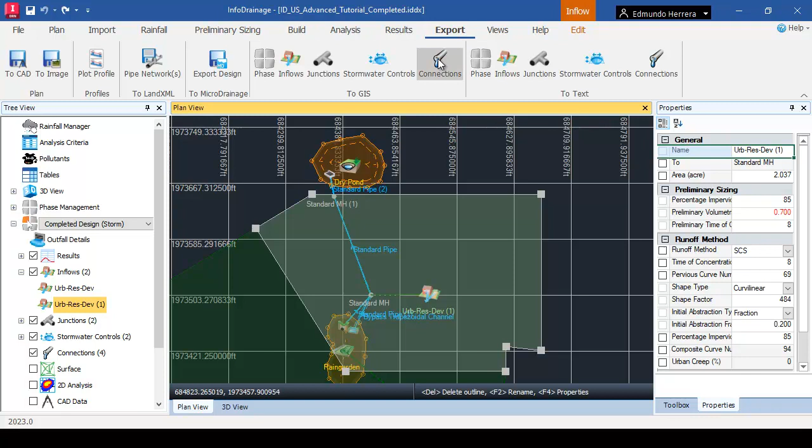Both InfoDrainage and ICM are capable of exporting shapefiles that include geometric and analysis attributes for every element in the network, including its geometric position under a previously defined coordinate system.

As previously stated, the first product to be presented as part of the AEC Collections is Autodesk InfraWorks. Autodesk InfraWorks allows architecture, engineering, and construction professionals to analyze and visualize infrastructure design concepts, improving decision-making and accelerating approvals.

The very first step using Autodesk InfraWorks is to create a model. If there's no data available to create a model, Model Builder is then used to create a model for a specific area. I will be typing Naperville, Illinois, and notice that the map automatically zooms into that area.

After typing a model name and selecting a proper coordinate system, the request is sent to the cloud. Once the model is created, it will appear on the list of available models. By double-clicking on the model from the list, users have the option to work locally or in the cloud.

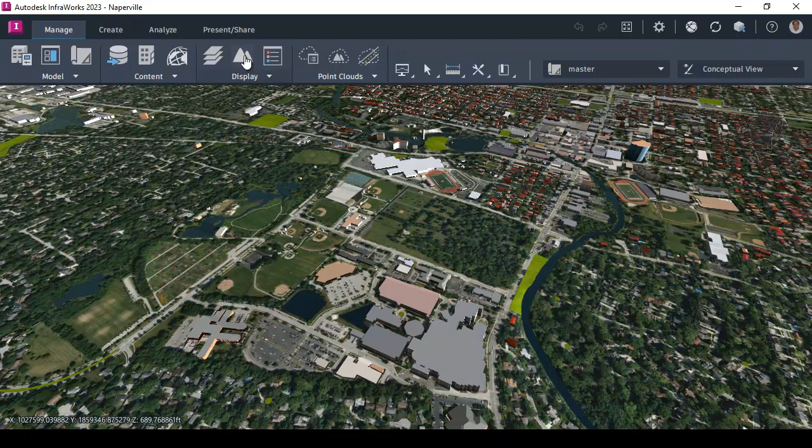The model by default is made out of images from Microsoft Bing, buildings, roads, and water bodies from OpenStreetMap, as well as surfaces by USGS that may be visualized with color-coded elevation ranges defined by users.

By importing multiple file formats such as LandXML files, point clouds, raster images, and shapefiles, the model can be enriched to add greater level of detail.

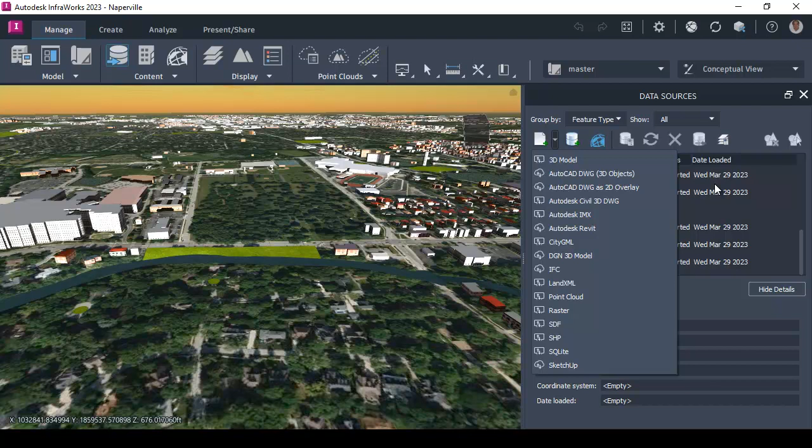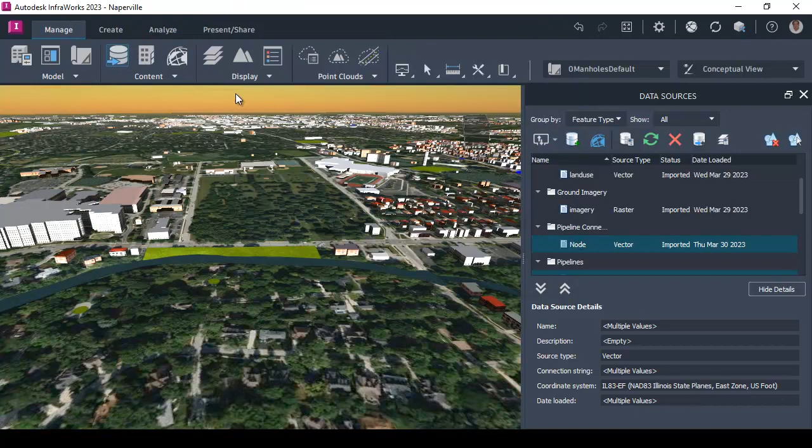Shapefiles exported from InfoDrainage and ICM representing nodes and conduits are imported into the model. Likewise, InfraWorks is able to import map data using the Autodesk connector for ArcGIS, accessing the content section in ArcGIS Online accounts by mapping layers to InfraWorks features such as pipelines and pipeline connectors.

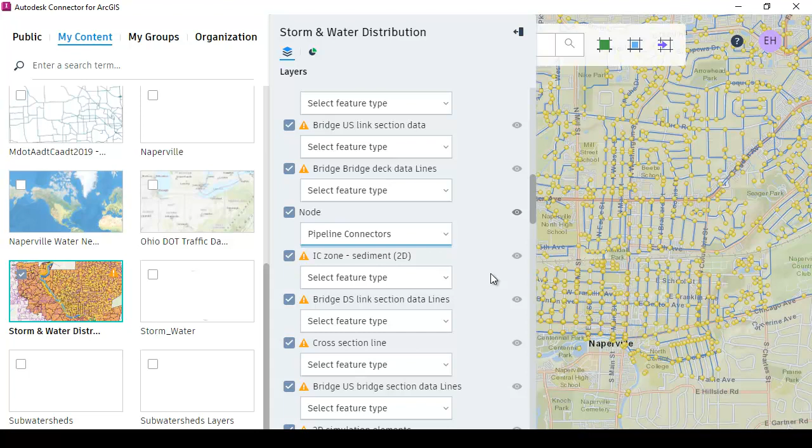InfraWorks users have the ability to assign exported attributes to pipeline connectors and conduits such as diameter, height, ground elevations, upstream invert, and downstream invert elevations to accurately represent the exact positioning and geometry of all network elements.

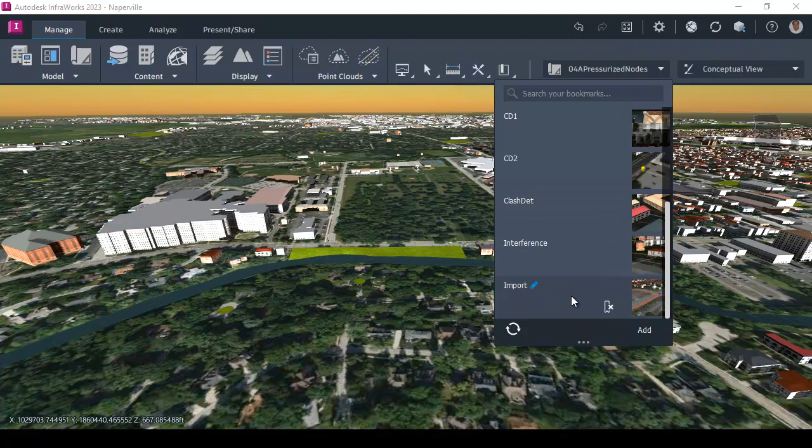Once data has been configured, and by selecting a Saved View in the project, the imported network is visualized in the model at the exact desired position.

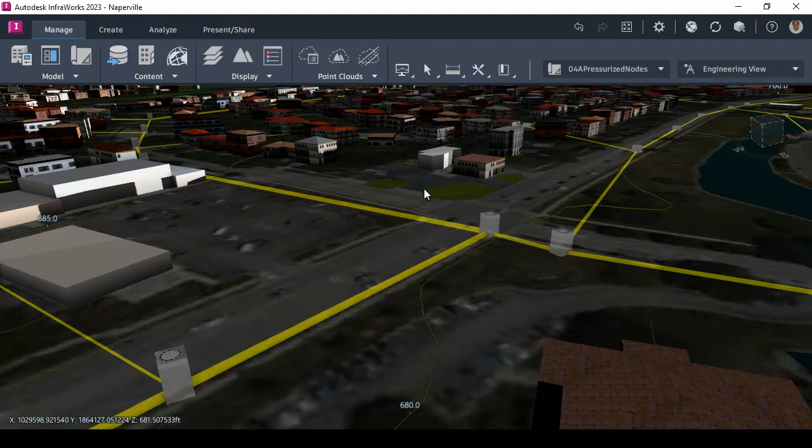By switching to an engineering view mode, the model is simplified for visualization purposes, including surface transparency to properly visualize the entire network. Network properties and every attribute from InfoDrainage and ICM can be reviewed by selecting any element on the model.

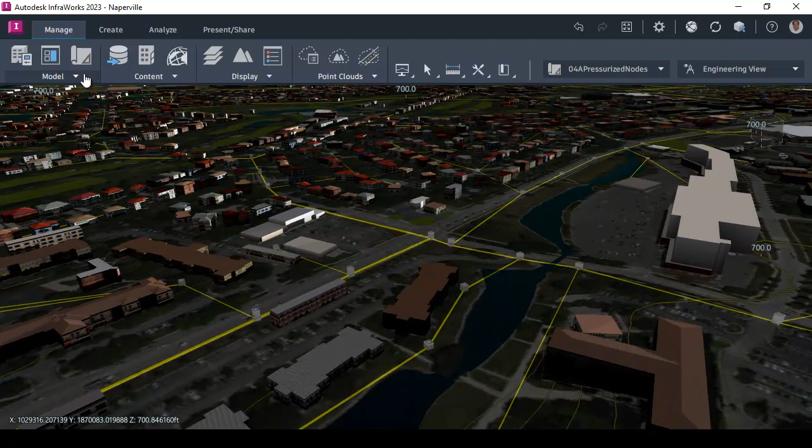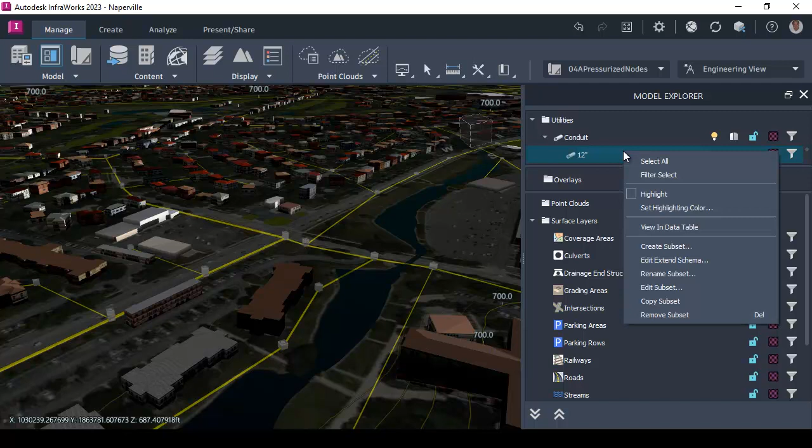The model can be analyzed by creating style rules to run queries based on custom geometry and hydraulic attributes, filtering results that exclusively meet the current rule properties. A rule is created to filter 12-inch conduits from all network elements.

Results can be visualized in a data table format containing properties for every record found. Likewise, any record in the table can be highlighted, and by selecting Zoom to Selected, the view in the model focuses solely on the desired element.

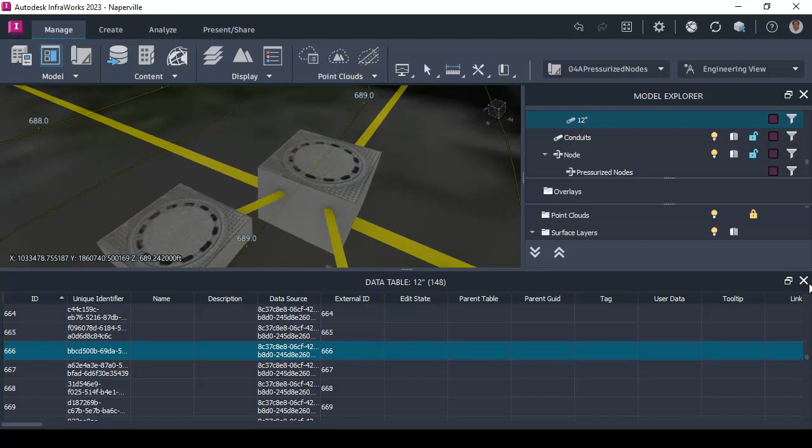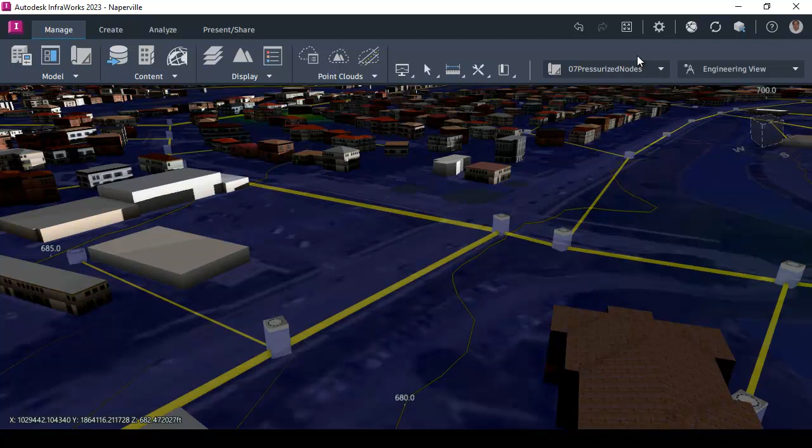An additional rule is created to visualize nearly pressurized nodes. In addition to visualizing results in a data table, suitability maps can be created in InfraWorks to generate heat maps around elements to easily filter complex results in a visually compelling manner.

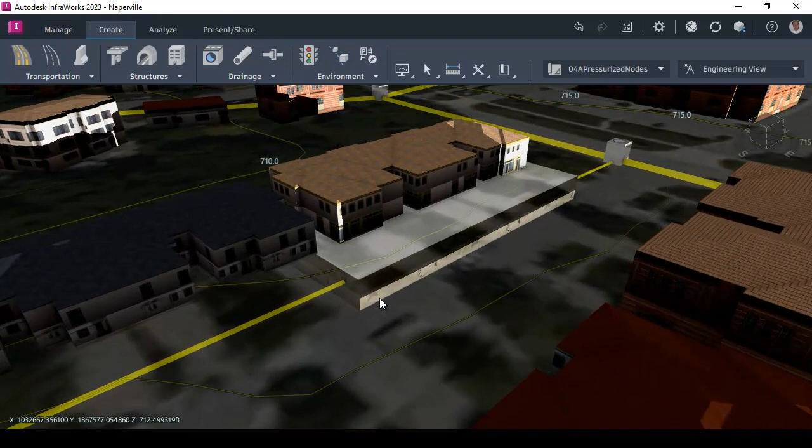The model is also utilized to study and graphically identify potential clashes in the network. Markers or points of interest will be created at conflict points, alerting users of issues in the model.

Additional data from multiple public sources can be imported in addition to InfoDrainage and ICM data, such as alternate networks, gas lines, and fiber optic cables.

From the City of Naperville's website, another storm conduit shapefile will be downloaded and imported into the model to accurately create underground utilities and properly manage network assets.

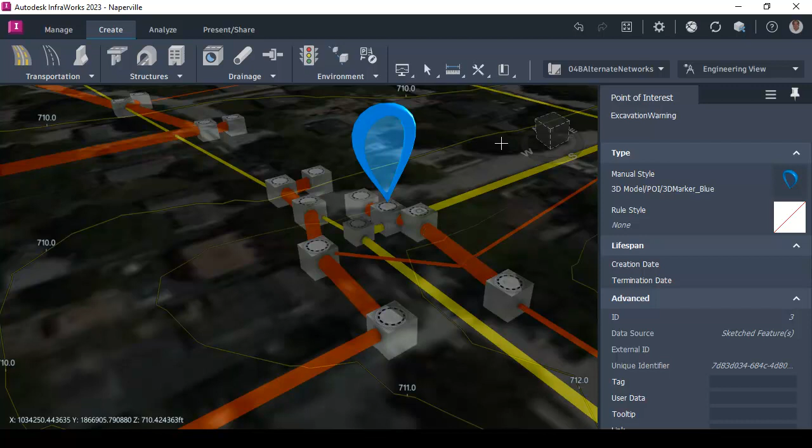Points of interest can be created to alert users of a high density number of elements at specific locations. Files can then be attached to these locations to enhance understanding and properly manage utilities, visualizing data related to specific locations by simply hovering over elements in the model.

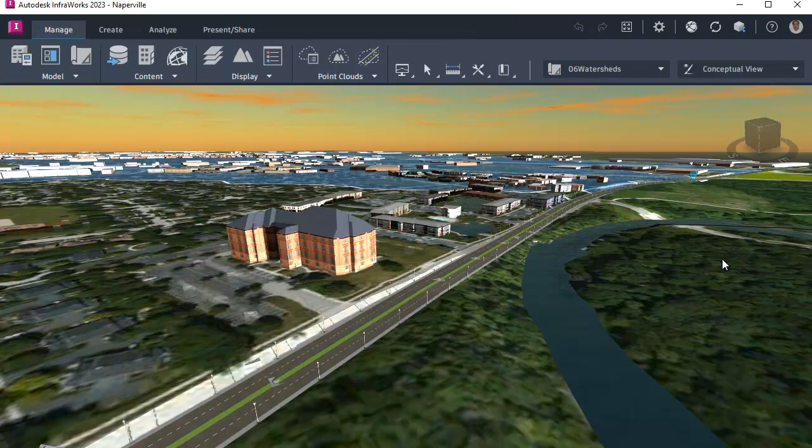Typical road sections, horizontal and vertical alignments can easily be created in InfraWorks.

Tributary road watersheds are created by simply selecting roads in the model, and once generated, users can select the proper hydrology method as well as runoff coefficients and intensities. Qs, areas, crossing road channel lengths, and slopes are automatically computed and displayed.

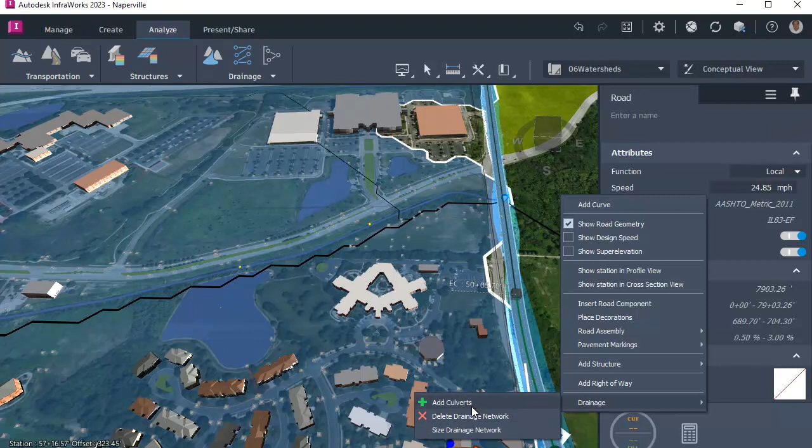By selecting a road, users are then able to automatically add culverts at channel crossings. Culverts are automatically assigned Qs and analyzed according to FHWA standards.

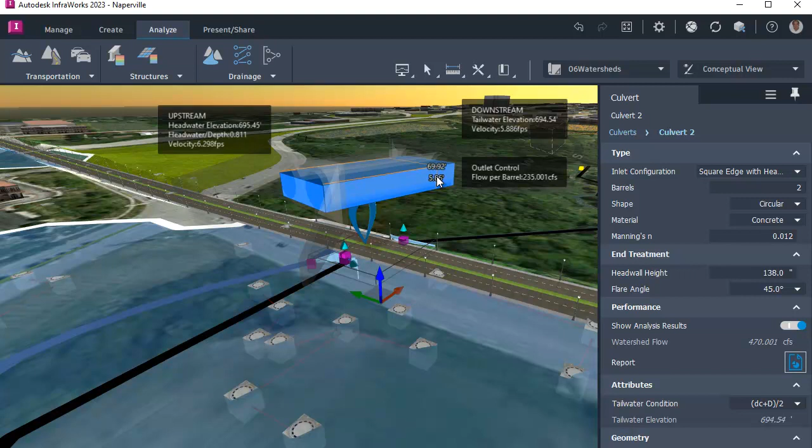At any point, the culvert geometry can be modified, including the number of barrels, culvert type, shape, material, coefficient, and diameters. Analysis is automatically and dynamically recomputed, including a detailed results report.

Most counties require excavation permits, as can be seen in Naperville, where customers need to submit requests specifying excavation details, including proposed depths and locations.

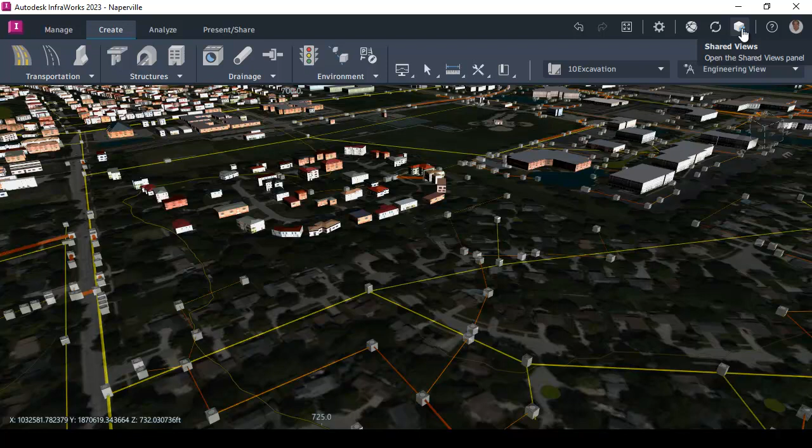A partial model will be generated at the proposed location by creating a shared view in the area of interest, representing an online view of the model uploaded from InfraWorks.

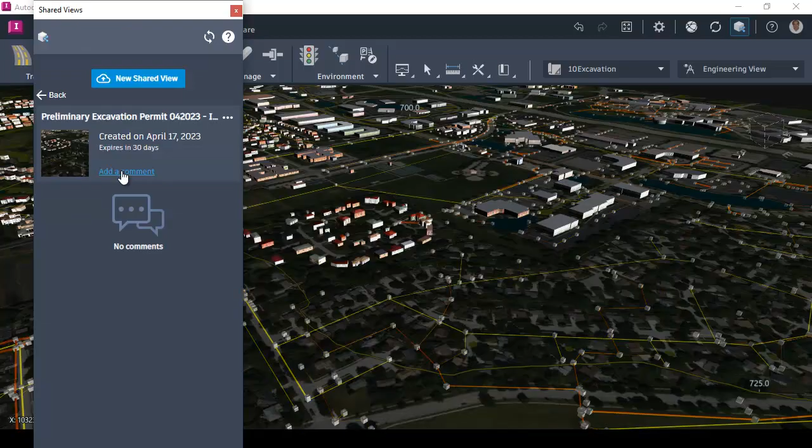After the view is generated, owners have the ability to add comments on a cloud share environment using Autodesk Viewer. The viewer offers additional functionality to browse the model, where users have the ability to isolate and review element properties in the model.

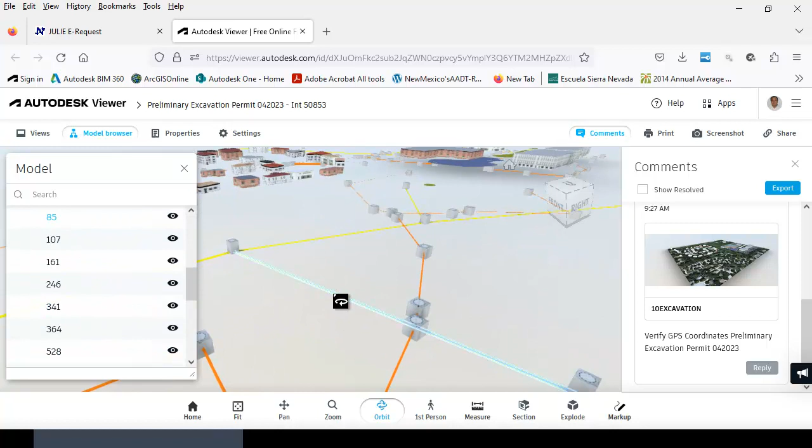Likewise, X and Y planes can be created to slice the network, having the ability to review the model by measuring network elements in all directions.

After switching back to the InfraWorks model, shared views are updated, reflecting updated comments. The shared view's link is copied and emailed to field crews, where they will review comments from design teams.

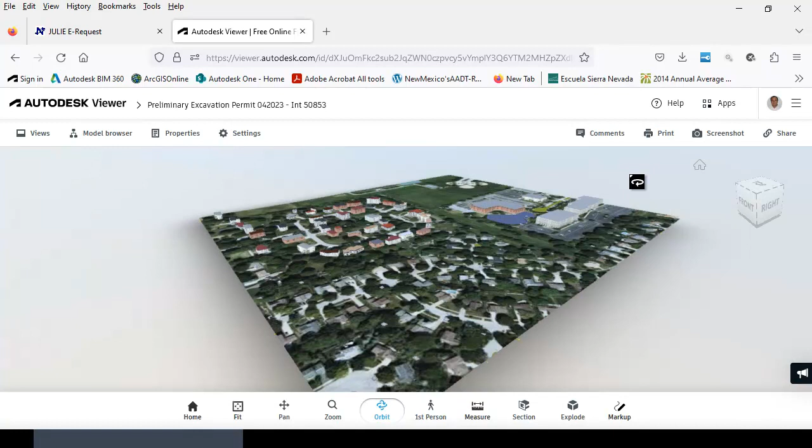The shared link can also be sent to anyone for reviewing models and printing views without the need for a software license or subscription. Field crews will open the link, where they will respond back to design teams in the comments section.

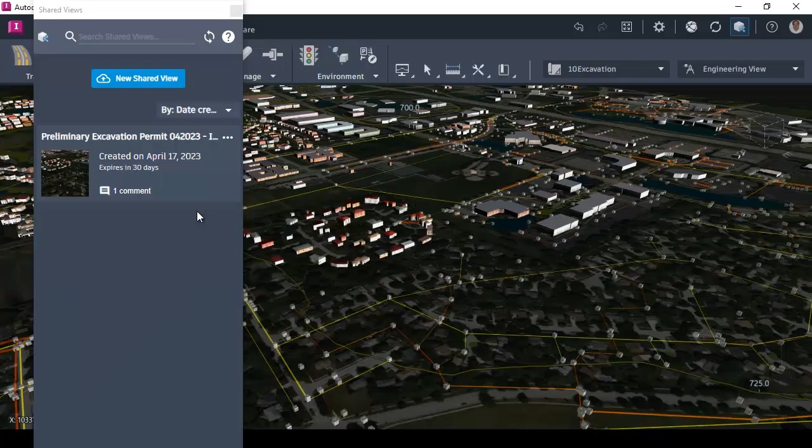The view is refreshed in InfraWorks with updated comments from the field crew. A marker or point of interest is placed on the model and adjusted with proper field coordinates.

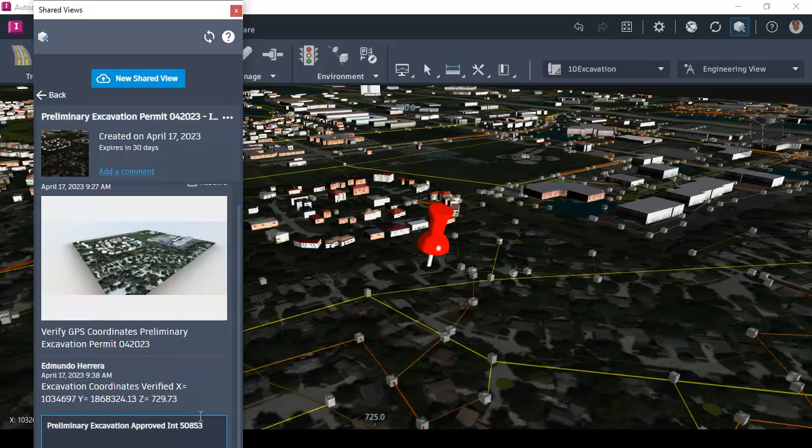Final comments are added to the model and automatically updated on the viewer, where a detailed history of comments report is generated. The link is then attached to the marker, where it will automatically open as users hover over its location, for proper data management.

The second product to be presented as part of the AEC Collections is Autodesk Docs. Autodesk Docs is a cloud-based common data environment that provides document management and control of centralized files to the entire project team. When InfraWorks models are created from Model Builder, users have the option to work locally or under a cloud environment using Autodesk Docs.

When Autodesk Docs is selected, users are allowed to choose an appropriate folder to sync to. The model will then behave with a copy in Autodesk Docs and a local cache copy to work on and synchronize back to the cloud.

Account administrators have the ability to create projects on the cloud, and once they are created, project team members are added, granting them permissions to work with Autodesk Docs. After team members are added, the directory structure is then defined inside the project, where working files will be stored and shared amongst the entire project members.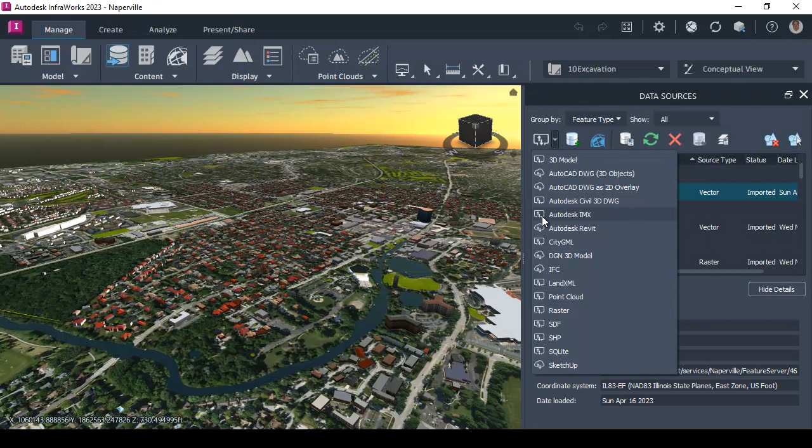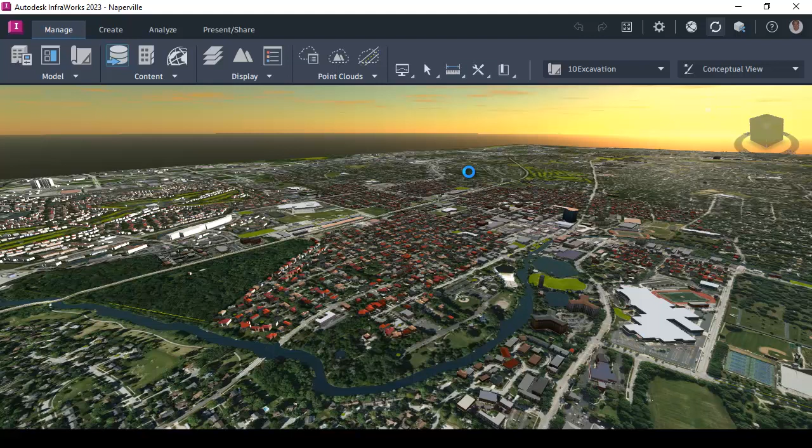When working on the cloud, InfraWorks users have the ability to import data directly from the file directory structure created in Autodesk Docs. When working with Docs, the Synchronize option in InfraWorks checks the cloud model for changes and allows users to synchronize data as desired.

When working with InfraWorks on the cloud, a file collaboration file is created in Docs, storing history data in 3D views corresponding to each proposal, where users can review the model without the need for InfraWorks to be installed on their machines, by just using a browser.

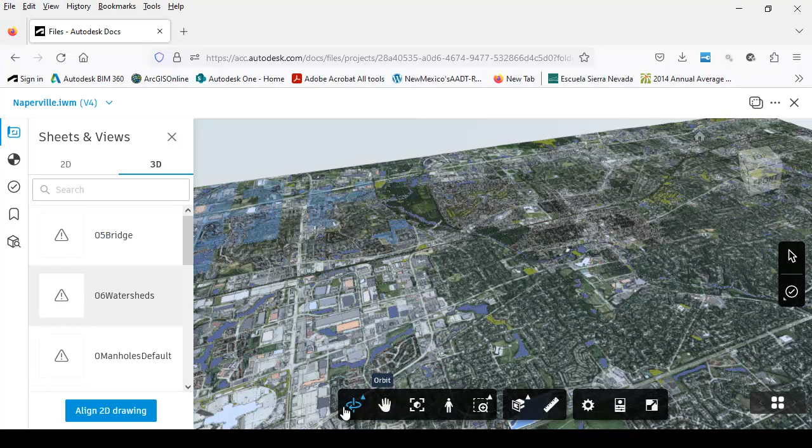Likewise, users have tools that provide the ability to orbit, pan, fit to view, zoom, measure and recall saved views on the model to review element properties.

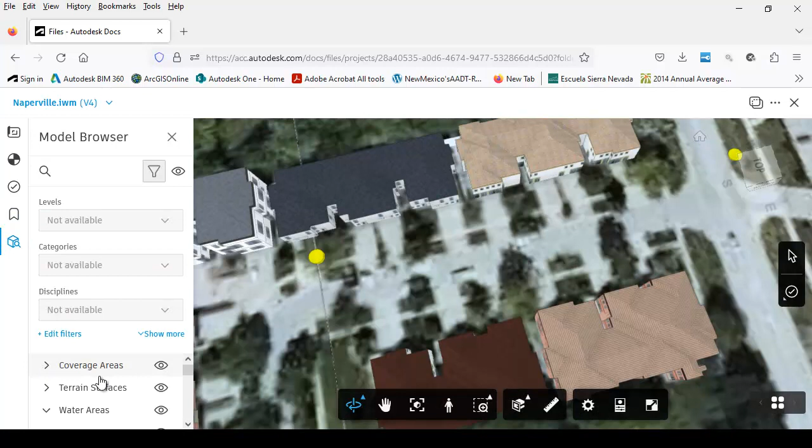Users also have the capacity to display or turn off elements from Model Browser, as well as to add issues, adding descriptions, and assigning them to project members, including due dates and locations.

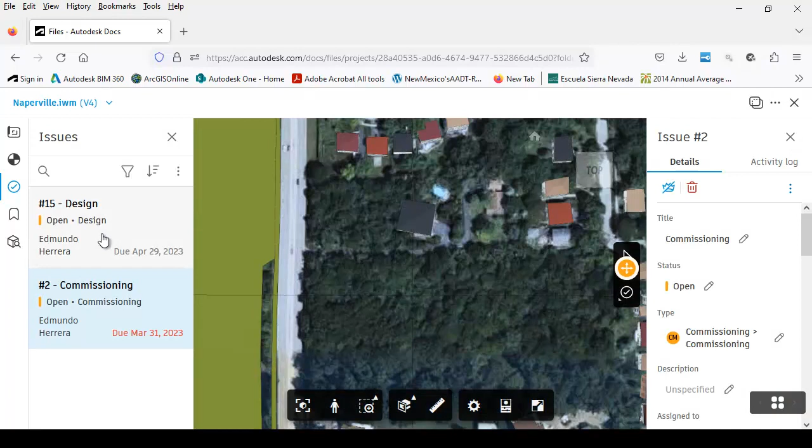The issue section in the collaboration file lists every single issue created in the project, and once selected, the browser will zoom to its location on the model, including all of its properties displayed on the right side of the browser. The third and final product I will be presenting as part of the AEC Collections is Autodesk Navisworks.

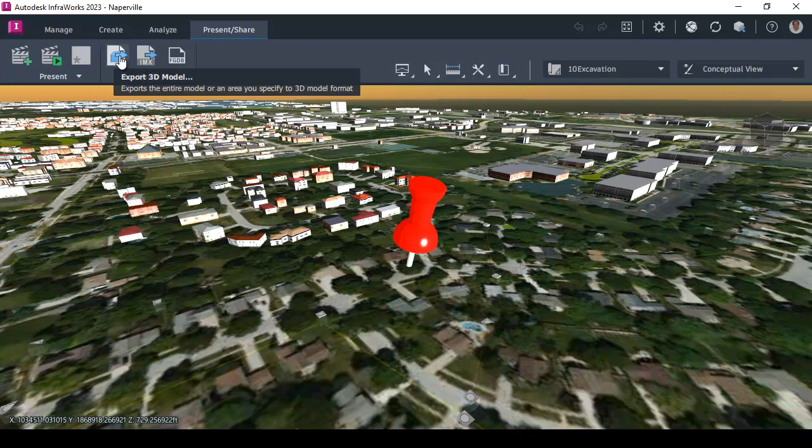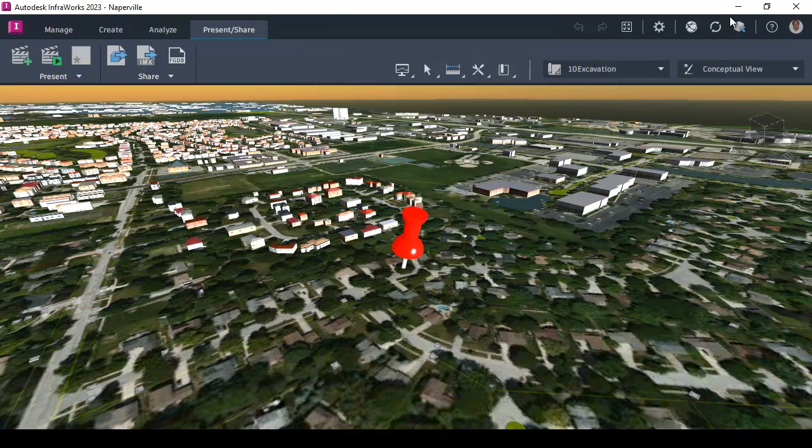Navisworks is a coordination and review software that allows imported models to identify and resolve interference problems and clashes. In InfraWorks, a 3D model will be generated by creating an area of interest, exporting every desired element in the model as solid files. Every solid file created in InfraWorks is then imported into Navisworks and recognized independently to properly manage data.

Ground solids will be turned off from the model, and the Navisworks project in its current stage will be saved in Autodesk Docs on its proper directory structure. The Clash Detective functionality in Navisworks defines two sets of objects that are tested for clashing against each other.

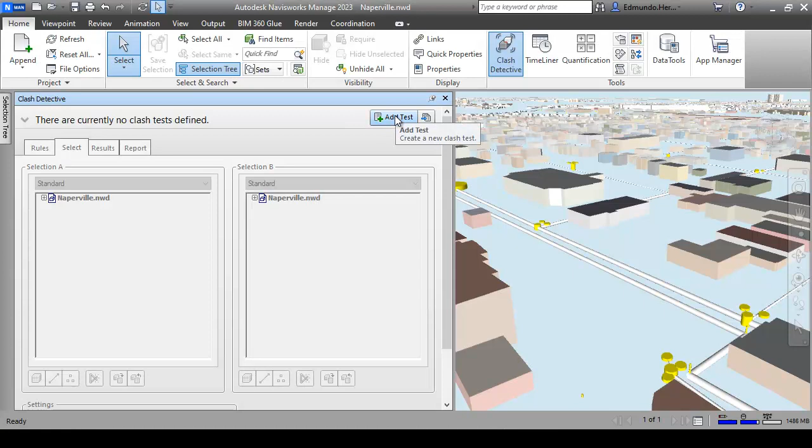Selected objects in Selection A are tested for clashing with selected objects in Selection B. A clash list is created, and once each clash is selected, the model will zoom into its location in the project.

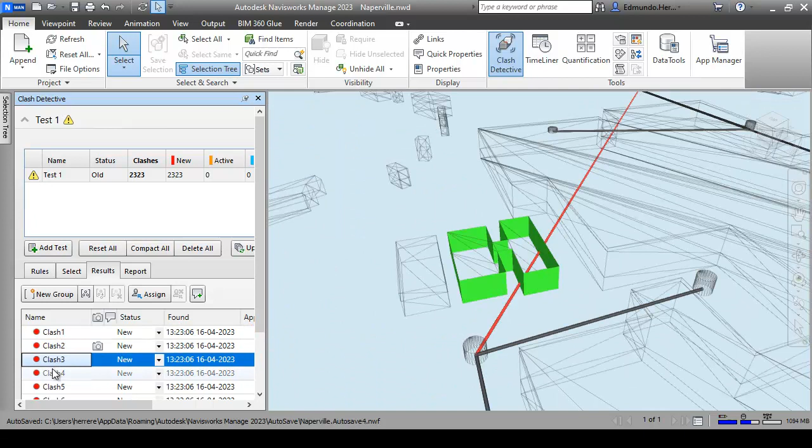Issues can be directly created in Navisworks by specifying its location and by typing in all desired properties. Since the Navisworks model is saved in Docs, the issue created in Navisworks will automatically appear on the Issue section in the browser. The issue placement file is then selected from Docs, opening the Navisworks collaboration file in the cloud,

where users can review every conflict created by project team members without the need to have Navisworks installed on their machines.

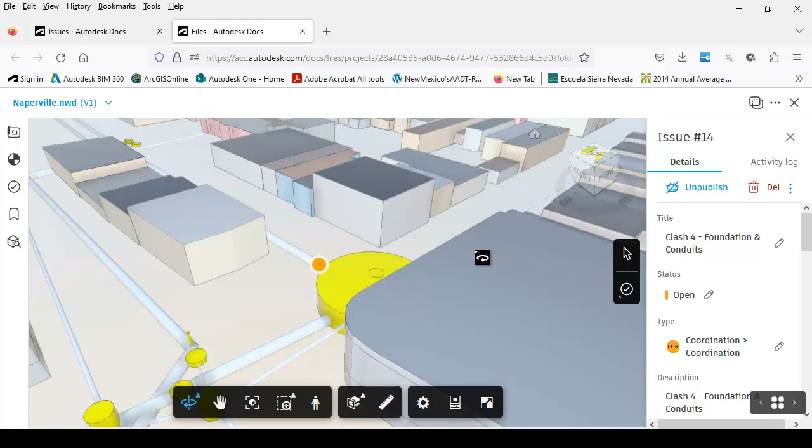Both Autodesk Innovyze products and Autodesk's AEC Collections are a very powerful set of solutions. However, their capacity is exponentially compounded when both solutions work in tandem. Thank you very much for watching.